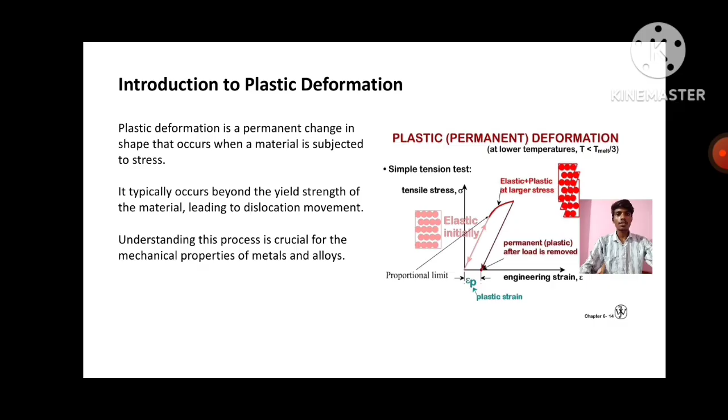Introduction to plastic deformation. Plastic deformation is a permanent change in shape that occurs when a material is subjected to stress. It typically occurs beyond the yield strength of the material, leading to dislocation movements. Understanding these properties is crucial for the mechanical properties of metals and alloys.

Mechanism of plastic deformation. Dislocation slip is the primary mechanism of plastic deformation in crystalline materials. Twinning is another mechanism that can occur particularly in hexagonal close packed metals. The balance between these mechanisms influences the overall ductility and strength of the material.

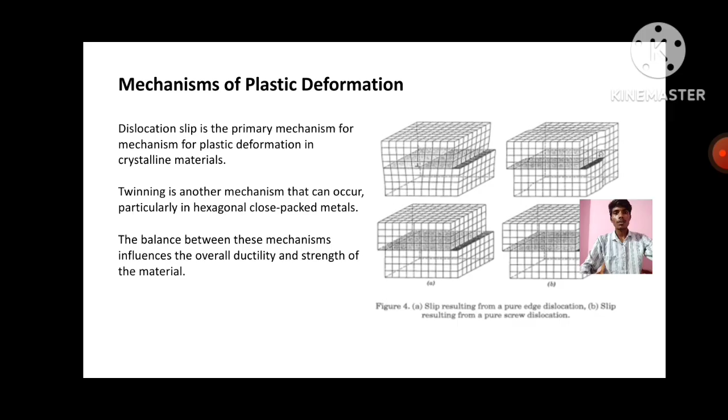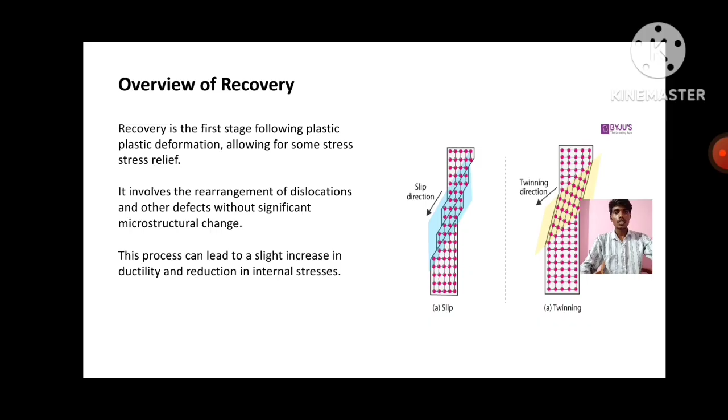Overview of recovery. Recovery is the first stage following plastic deformation, allowing for some stress relief. It involves rearrangement of dislocations and other defects without significant microstructural change. This process can lead to a slight increase in ductility and reduction in internal stresses.

Mechanism of recovery. Dislocation climb allows dislocations to move out from their slip planes, aiding in stress relaxation. Vacancy diffusion plays a key role in the recovery process, affecting dislocation movement. The recovery process generally occurs at elevated temperatures but below its recrystallization temperature.

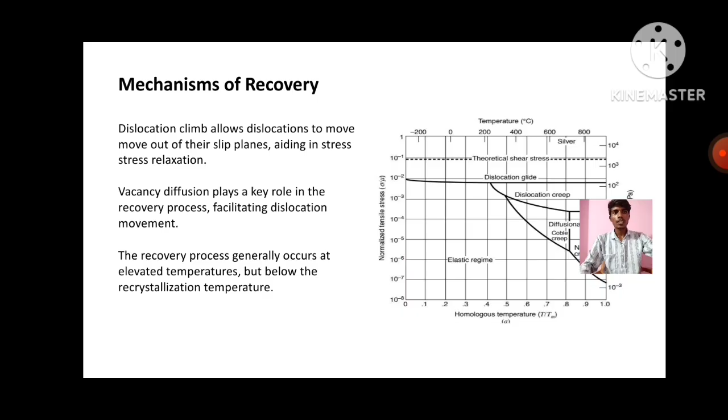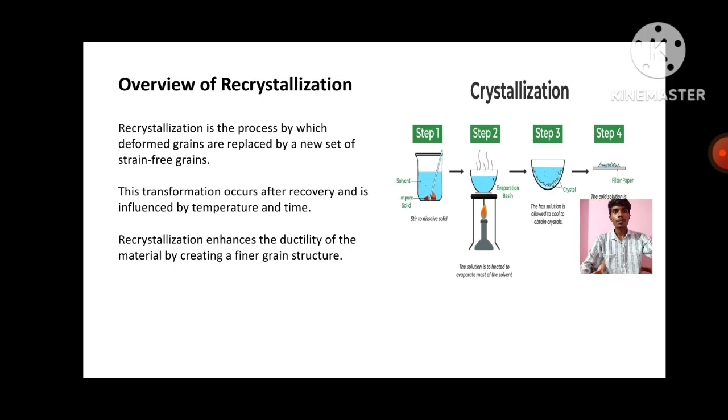Overview of recrystallization. Recrystallization is a process by which deformed grains are replaced by a new set of strain-free grains. The transformation occurs after recovery and is influenced by temperature and time. Recrystallization enhances the ductility of the material by creating a finer grain structure.

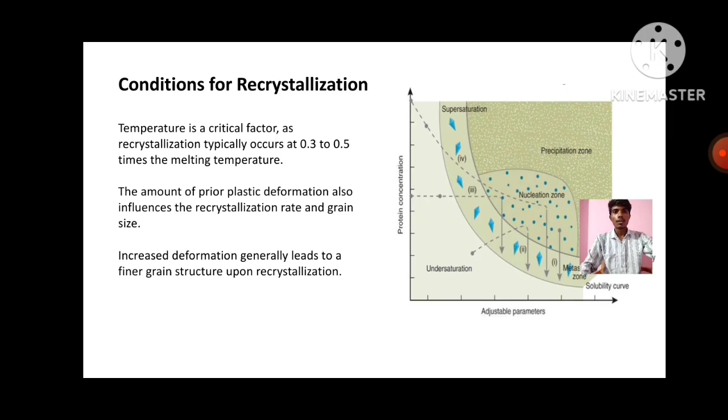Conditions for recrystallization. Temperature is a critical factor, as recrystallization typically occurs at 0.3 to 0.5 times the melting temperature. The amount of prior plastic deformation also influences the recrystallization rate and grain size. Increased deformation generally leads to a finer grain structure upon recrystallization.

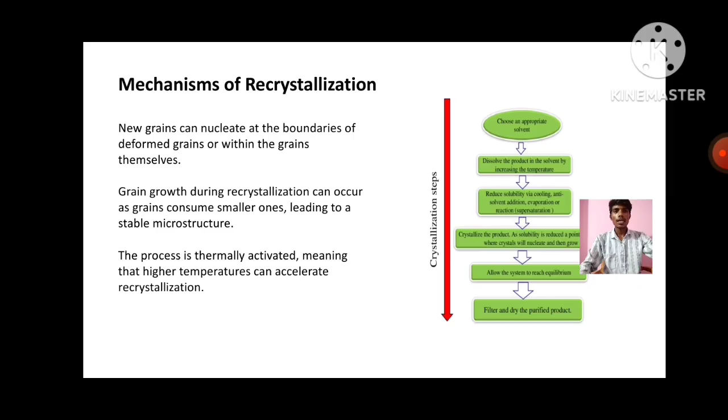Mechanism of recrystallization. New grains can nucleate at the boundary of deformed grains or within the grains themselves. Grain growth during recrystallization can occur as larger grains consume smaller ones, leading to a stable microstructure. The process is typically thermally activated, meaning higher temperature can accelerate recrystallization.

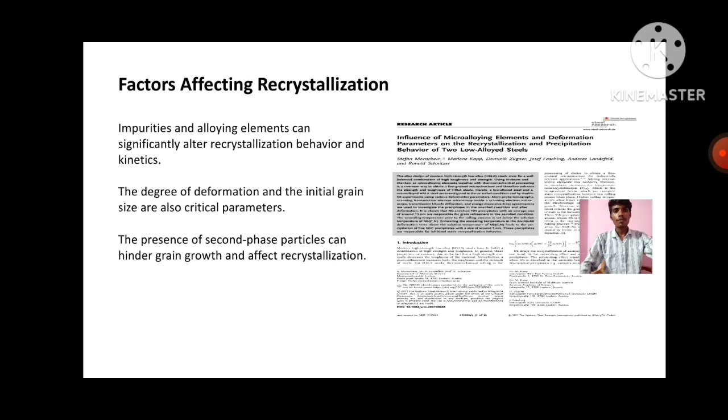Factors affecting recrystallization. Impurities and alloying elements can significantly alter recrystallization behavior and kinetics. The degree of deformation and the initial grain size are also crucial parameters. The presence of second phase particles can hinder growth and affect recrystallization.

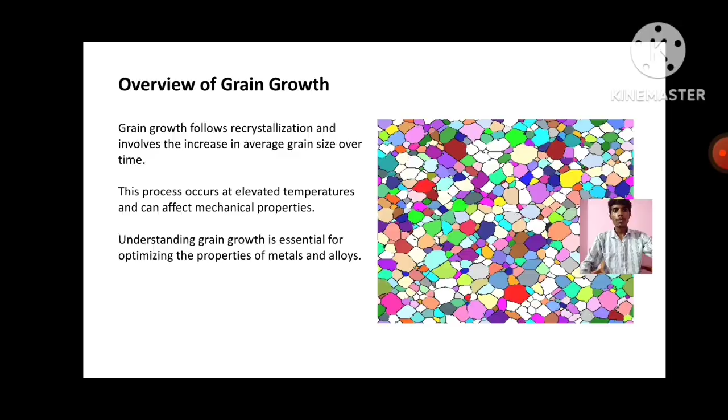Overview of grain growth. Grain growth follows recrystallization and involves an increase in average grain size over time. The process occurs at elevated temperature and can affect mechanical properties. Understanding grain growth is important for optimizing the properties of metals and alloys.

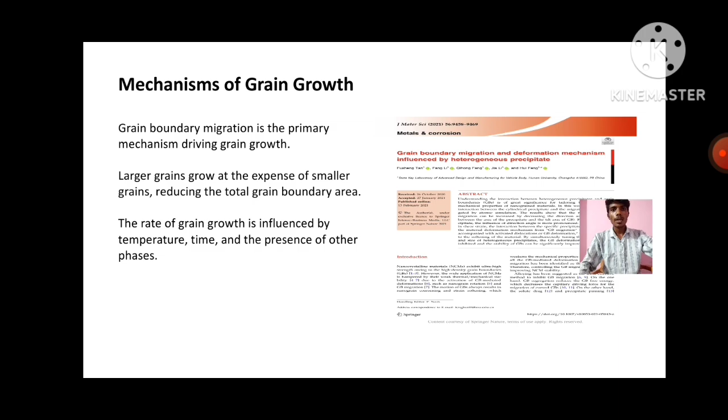Mechanism of grain growth. Grain boundary migration is the primary mechanism driving grain growth. Larger grains grow at the expense of smaller grains, reducing the total grain boundary area. The rate of grain growth is influenced by temperature, time, and the presence of other phases.

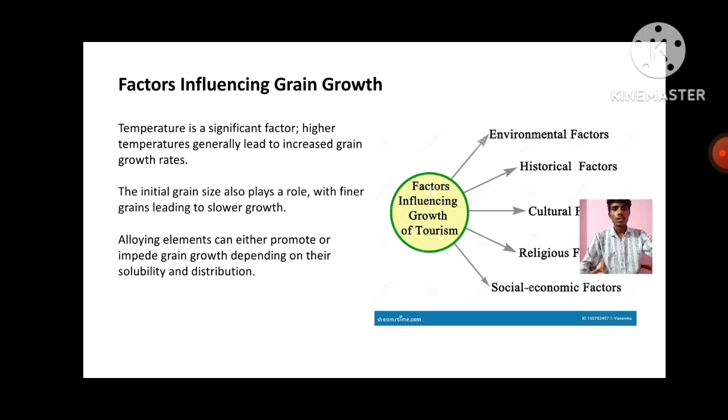Factors influencing grain growth. Temperature is a significant factor; higher temperature generally leads to increased grain growth rates. The initial grain size also plays a role, where finer grains lead to slower growth. Alloying elements can either promote or inhibit grain growth depending on their solubility and distribution.

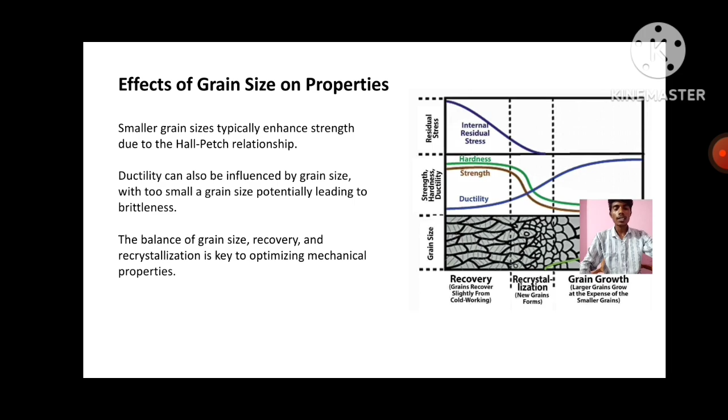Effects of grain size on properties. Small grain sizes typically enhance strength due to Hall-Petch relations. Ductility can also be influenced by grain size, with too small a grain size potentially leading to brittleness. Balancing grain size, recovery, and recrystallization is key to optimizing mechanical properties.

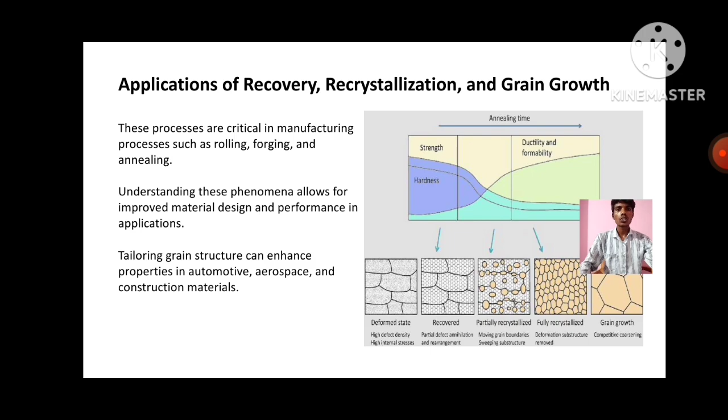Applications of recovery, recrystallization, and grain growth. These properties are crucial in manufacturing processes such as rolling, forging, and annealing. Understanding these phenomena allows for improving material design and performance in applications. Tailoring grain structure can enhance properties in automotive, aerospace, and construction materials.

Experimental techniques for studying microstructure. Techniques like electron microscopy and X-ray diffraction are used to analyze microstructure changes. These methods provide insights into the grain size, shape, and distribution after deformation and thermal treatments. Understanding these techniques is essential for material science research and development.

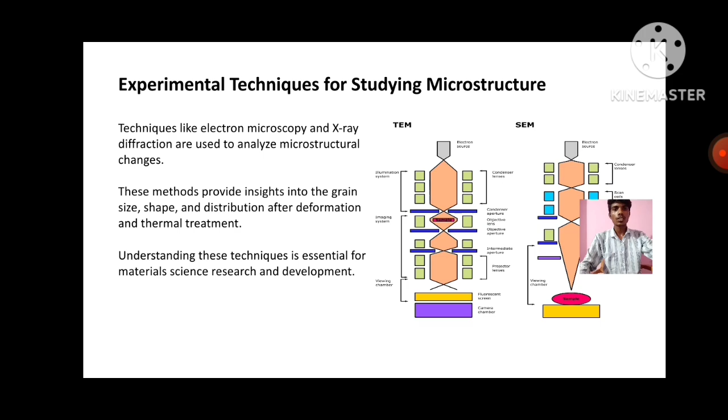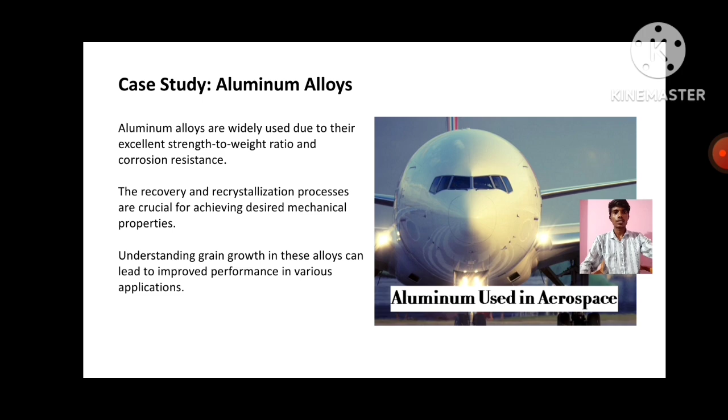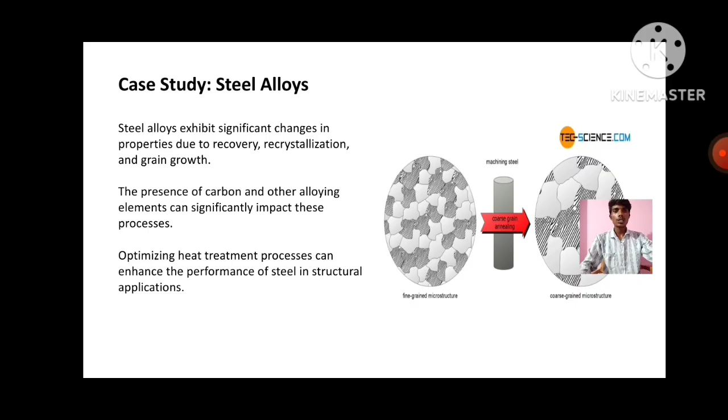Case study on steel alloy. Steel alloy exhibits significant changes in properties due to recovery, recrystallization, and grain growth. The presence of carbon and other alloying elements can significantly impact these processes. Optimizing heat treatment processes can enhance the performance of steel in structural applications.

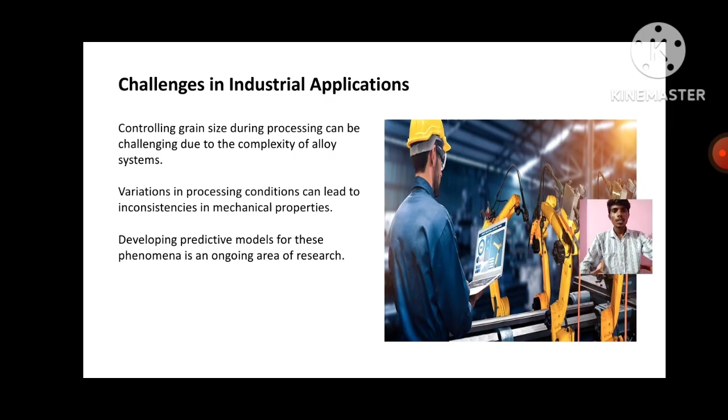Challenges in industrial applications. Controlling grain size during processing can be challenging due to the complexity of alloy systems. Variations in process conditions can lead to inconsistency in mechanical properties. Developing predictive models for this phenomena is an ongoing area of research.

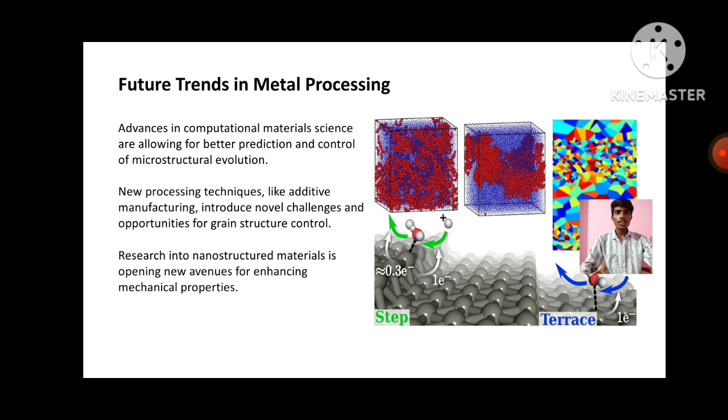Future trends in metal processing. Advances in computational material science are allowing for better prediction and control of the microstructure evolutions. New processing techniques like additive manufacturing introduce novel challenges and opportunities for grain structure control. Research into nanostructured materials is opening new avenues for enhancing mechanical properties.

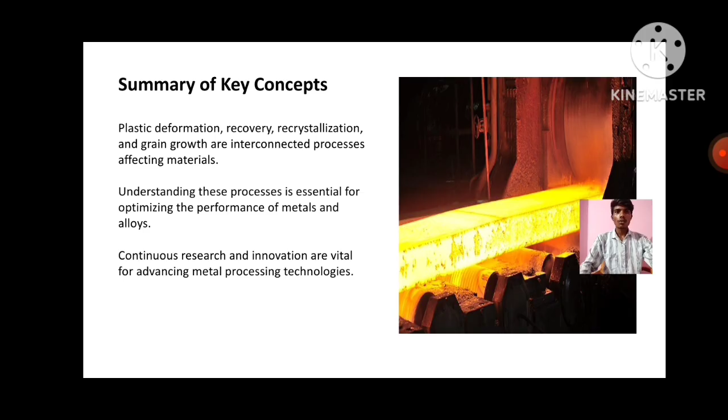Summary of key concepts: plastic deformation, recovery, recrystallization, and grain growth are interconnected processes affecting materials. Understanding these processes is essential for optimizing the performance of metals and alloys. Continuous research and innovations are vital for advancing metal processing technologies.

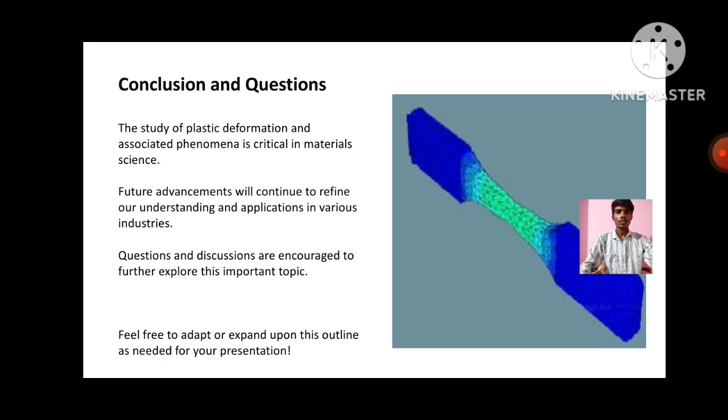Conclusion and questions. The study of plastic deformation and associated phenomena is crucial in material science. Future advancements will continue to refine our understanding and applications in various industries. Questions and discussion are encouraged for future exploration of these important topics. Thank you.